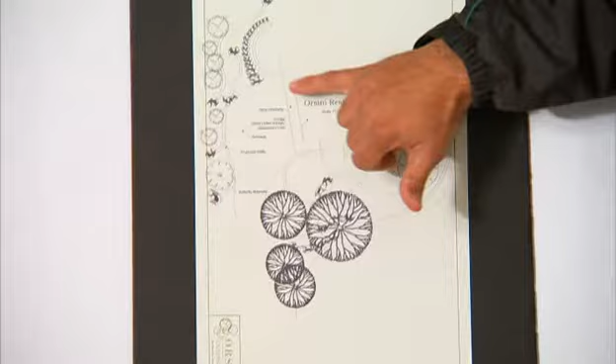The finished grade of the lower wall, I think, is this wall right here, is 0 plus 64? Yes. Okay, good. And this upper wall I have is 0 plus 92? Check. Okay, good. So we know that in that case, our bottom of excavation is going to be 0 minus 18 for this first wall, wall 1, which is going to give us a 10-inch embedment and an 8-inch base.

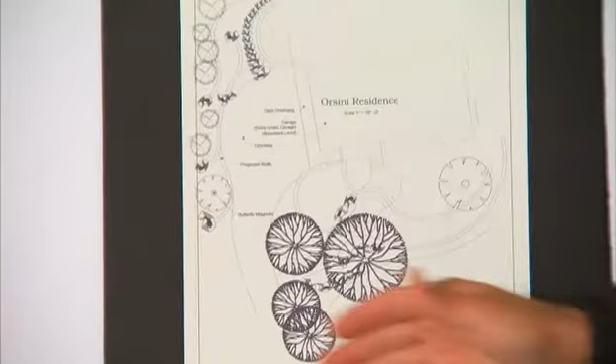In this case, our base is going to be an unreinforced concrete, a flowable fill material. Could use something else, but in this application with all these curves, I think that's going to work great for us. We're going to use Techo-Bloc's recommendations for wall design. We have our lower wall down here. Okay, we have our driveway coming off of that.

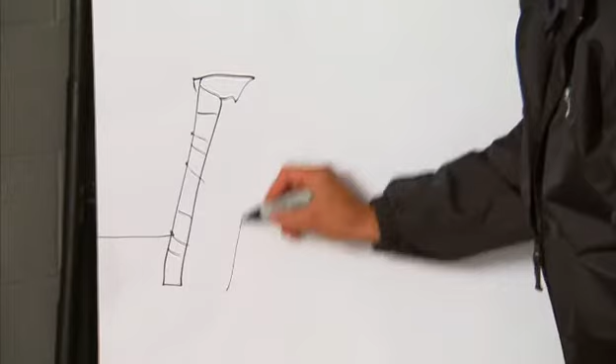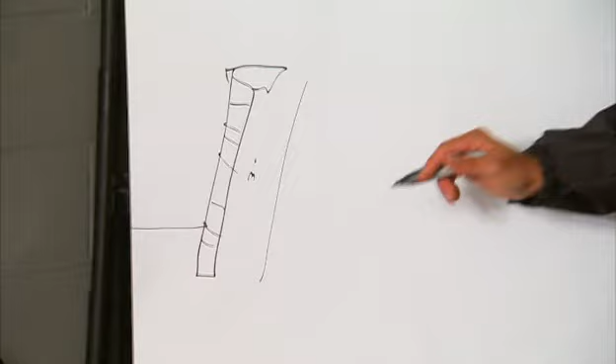Now what we're going to want to do is to make sure that we have a good 3-foot column of clean stone behind that wall. That's going to be very easy to compact. It's going to work well with drainage, and it's also going to work well with filtration of any sediment that runs through this system. We're going to want to make sure our base is adequately extended beyond the heel and toe of that block 6 inches. And in this case, because we're in a freeze-thaw susceptible climate, we're going to build it 8 inches thick.

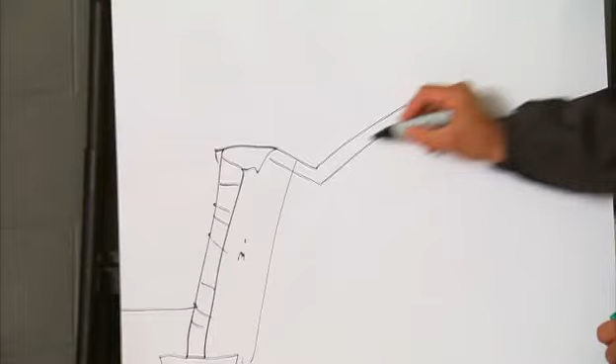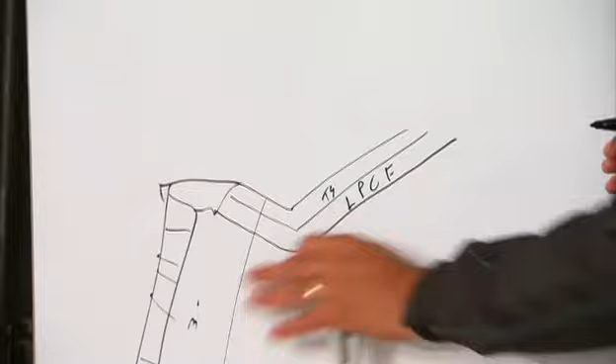Okay? One thing I want to be very careful that we do is that we build a swale in this wall. We're going to use topsoil and erosion-resistant vegetation in these areas, and then we're going to wrap that area in a low permeability clay fill. Low permeability clay fill. And that's going to keep the water from getting into this area and causing hydrostatic pressure that can get it to fail.

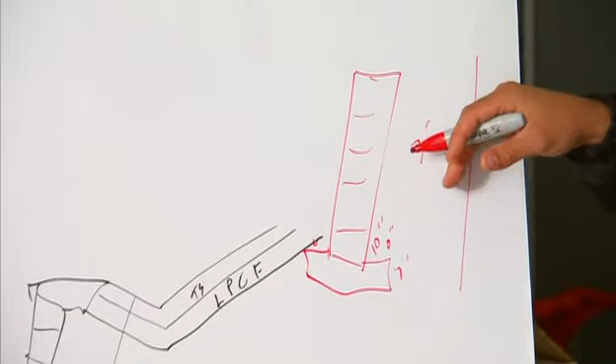Our upper wall, right here, again, a 10-inch embedment, 6 inches beyond the heel and toe of that block, 6 inches here, 6 inches here, 8 inches thick. Again, that 3-foot column of clean stone behind that wall. We may build a berm here to keep water from getting to my wall, again with topsoil and low permeability clay fill. Okay? We're going to have about 9-foot grid lengths in here, right?

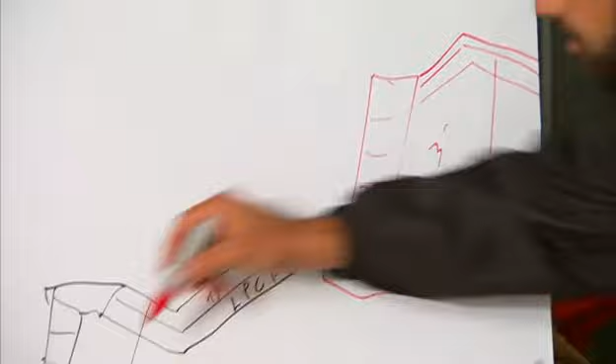So we need to make sure that we maintain that 95% standard Proctor density in here. Is the engineer going to be coming out with a nuclear density gauge test? Yeah. Okay, so we'll be able to test it as we go. Do we have any questions? All right, come on, let's get to work.